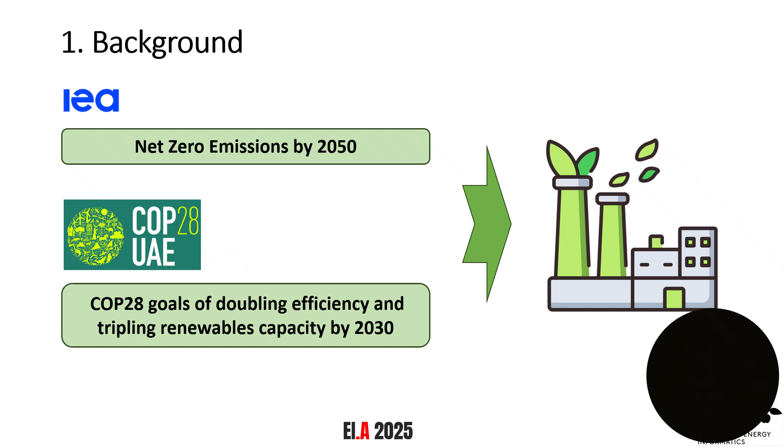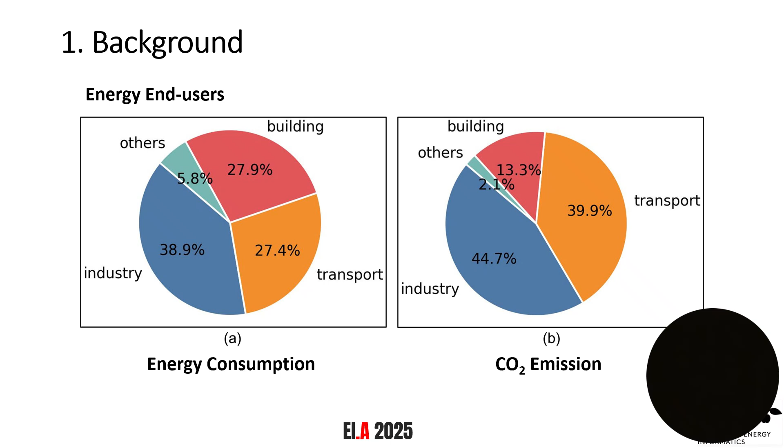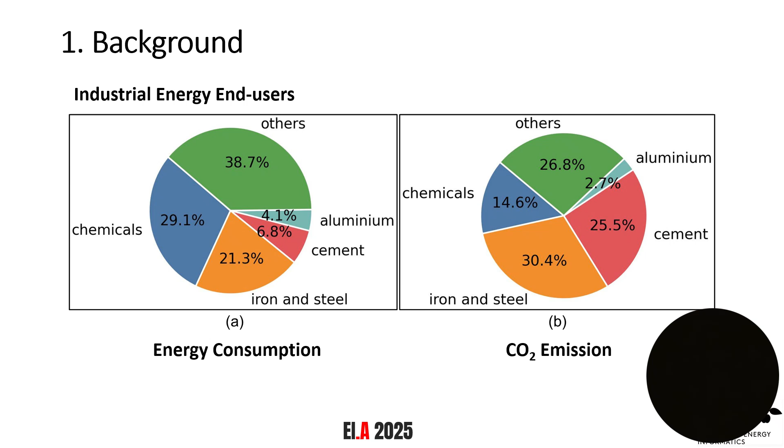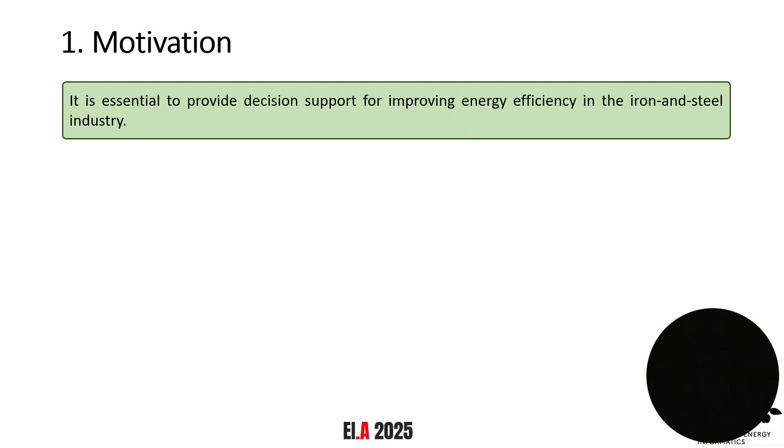Here is some data to support the view. Among the energy end users, the industry ranks first for energy consumption, and it is also the largest CO2 emission contributor. In more detail, among the industrial energy end users, the iron and steel sector contributes the second largest energy consumption and the largest CO2 emissions. Therefore, it is essential to provide decision support for improving energy efficiency in the iron and steel industry.

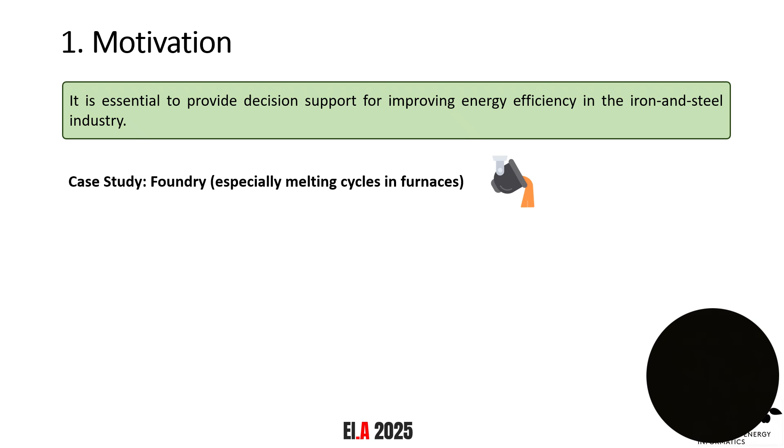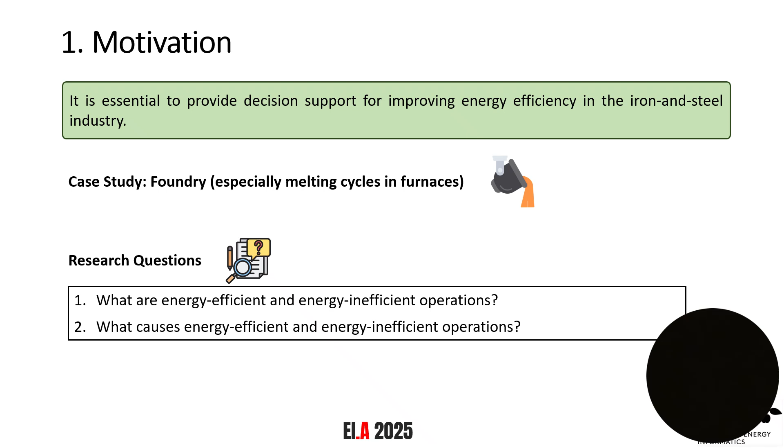In this study, we selected the foundry industry as a case study, especially analyzing the melting cycles in the furnaces in the foundry industry. To provide decision support for improving energy efficiency in this sector, these two research questions should be answered. The first one is, what are energy efficient and energy inefficient operations? And the second is, what causes energy efficient and energy inefficient operations?

To answer these two research questions, some data analysis methods should be employed. To answer the first question, a clustering algorithm can be employed to classify the energy consumption patterns into different groups. And to answer the second question, causal inference methods can be employed to identify the cause and effect relationships among the energy-related industrial process variables.

The first question has been answered in my previous publication, so some results of the clustering analysis will be directly used in this study. This paper mainly focuses on the causal inference in industrial processes with the foundry application. Next, I will introduce the methods and algorithms employed in this study.

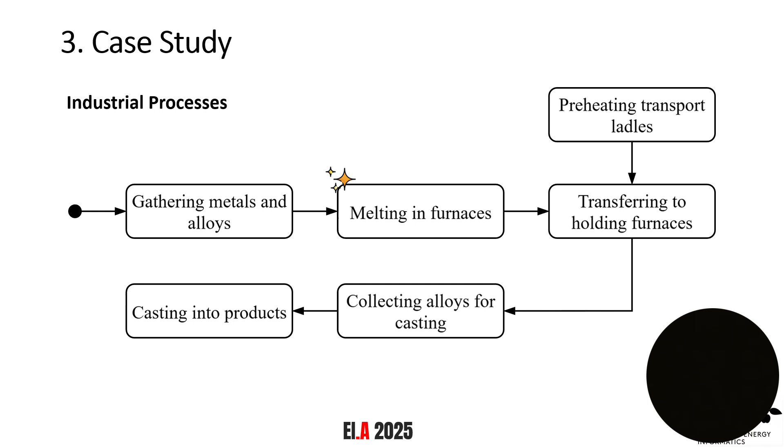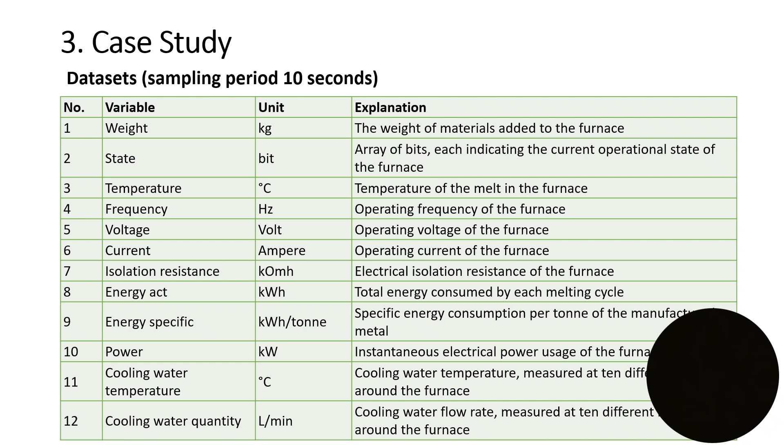Especially in this study, the subset of each cluster should be selected for causal inference because the entire time series dataset is over 1 year. And if we run the causal inference algorithm directly for each cluster, the run time is very long, and it's impossible to get the causal structure very quickly. So it is necessary to select the representative data sets for each cluster for highly efficient data analysis.

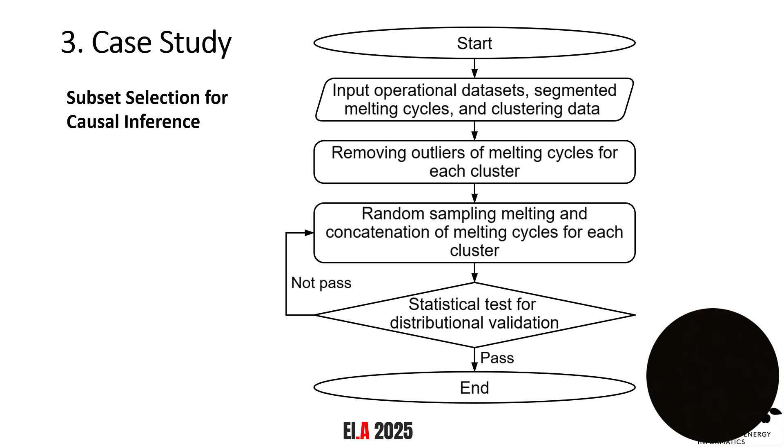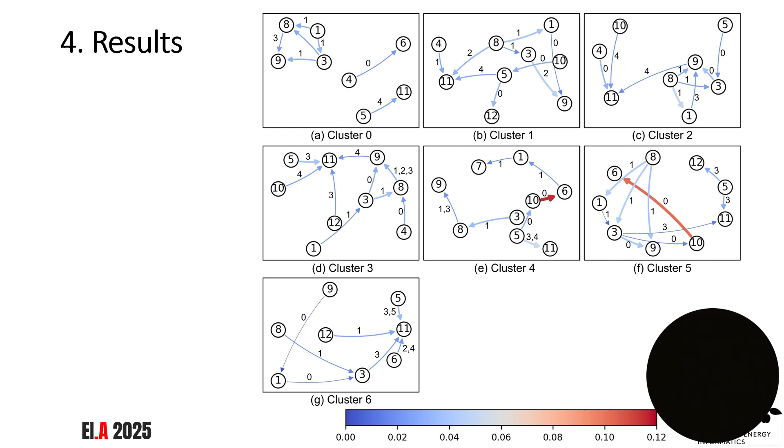And then we analyze the occurrence frequency of the different causal pairs. For example, the causal effect pair, variable 5 affects variable 11, occurs 6 times among the 7 clusters. Here are some key findings of the causal inference analysis. Firstly, we can find the relationship of voltage influencing the cooling water temperature appears in 6 clusters, and the time delay is minimum 30 seconds.

Secondly, some very important causal relationships directly regarding the energy efficiency are found. For example, the specific energy is influenced by the total energy and the furnace temperature. It's very interesting, and based on the domain knowledge, it's correct, because specific energy means the energy consumption per unit weight. So it is influenced by the total energy consumption, by the temperature, and the weight is meaningful.

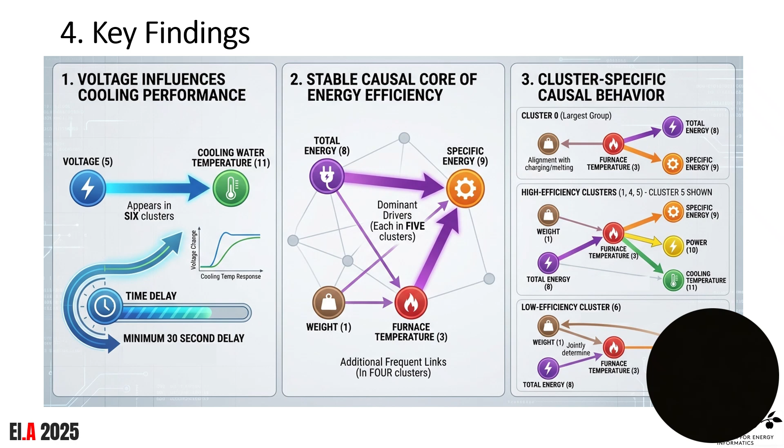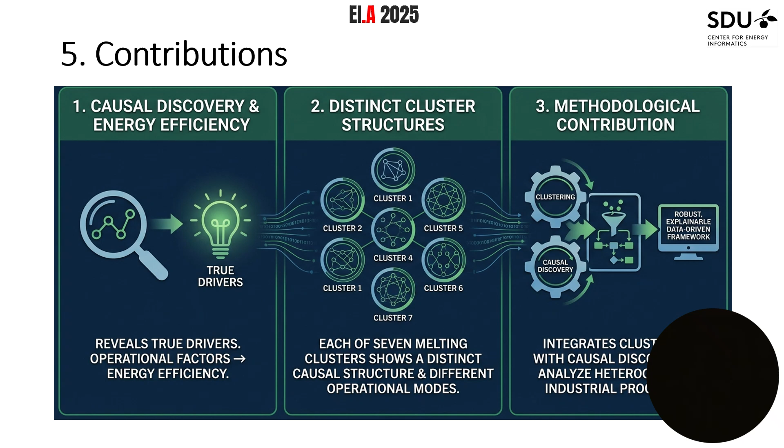This study still has some limitations. First of all, from the domain and data perspective, only one furnace in one foundry is analyzed here. In the future study, more furnaces and more foundries or some other industrial sectors can be analyzed using the same clustering and causal inference methods.

Next, in the current stage, we only analyze the observational causality, but it has not been verified by real-world scenarios. In the future study, we can do some experiments in real-world scenarios, or do some tests in digital twins by setting some specific scenarios to validate and verify the causal structures.